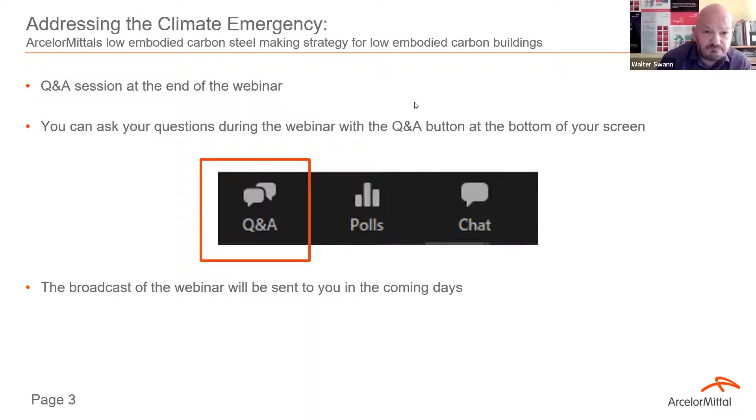I think the one thing about tackling the climate emergency is that we all need to be quite well connected and to be able to see things from different angles so that we can integrate processes, design processes, manufacturing processes together and have a deeper knowledge of the supply chain. So we'll start off with the steelmaking processes, but it will be relevant certainly to a structural engineer and to a broader construction supply chain. And we will tackle some numbers towards the end of the presentation. So hopefully something for everybody.

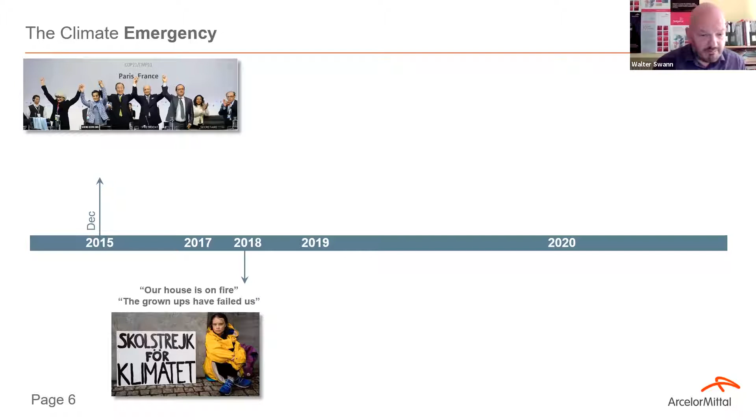So starting with the climate emergency. A little bit of a timeline, not dealing with the stuff which I guess you're already aware of, but really just wanted to pick it up as it started in the UK. So for me, it started back in April last year with the Extinction Rebellion demonstrations, which took place in London. And then in June of that year, Theresa May, as she left the UK government, committed the UK to being net zero carbon by 2050.

And that same month, a website popped up, which was the Construction Declares website. So just in case you're not aware of that, this was about organisations, companies basically declaring or acknowledging that the building industry, the construction industry, is responsible for 40% of global CO2 emissions, and signing a declaration to say, well, as a company involved in that sector, we're going to do something positive to achieve that net zero commitment by 2050.

Organisations such as the Royal Institute of British Architects, organisations such as the Institution of Structural Engineers have all signed up to that declaration, but it also includes construction companies, architects, engineers, MEP professionals, cost consultants.

The diversity in the UK is greater, but it has travelled globally as well. I think there are about 12 countries that have signed up to that agreement, but it tends to just be the architects in those countries. So that's kind of where we're at the moment with that.

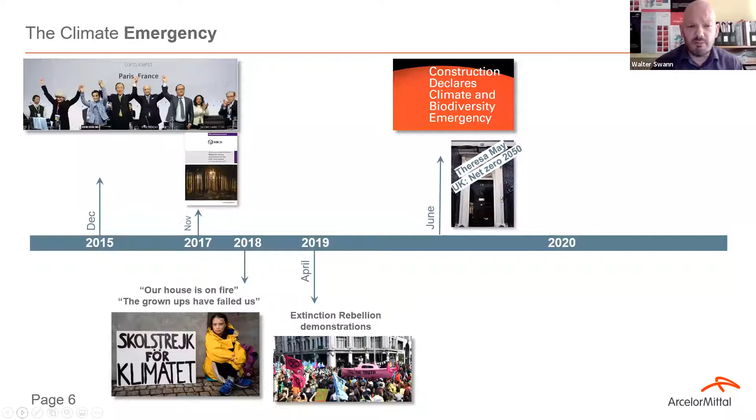Now starting to look at design guidance that's available. There's a couple of documents which I'll mention. There's the Royal Institution of Chartered Surveyors, which have this guide here. This is all about getting the measure correct, because if you're going to start to compare one scheme with another scheme or one building with another building, you've got to be able to compare apples with apples. So that's what that guide's about. That came out in November 2017.

In July of last year, there was a guide from the RIBA, and we'll pick that up later in the presentation. And in January of this year, there was another guide, the LETI Climate Emergency Design Guide. And again, we'll pick that up later. And then last month, we have the guide from the IStructE. So it's a paper which will launch the guide, which will be going out shortly. And that's been authored by John Orr, Orlando Gibbons, and Will Arnold. So that represents guidance being given to structural engineers on how to calculate embodied carbon.

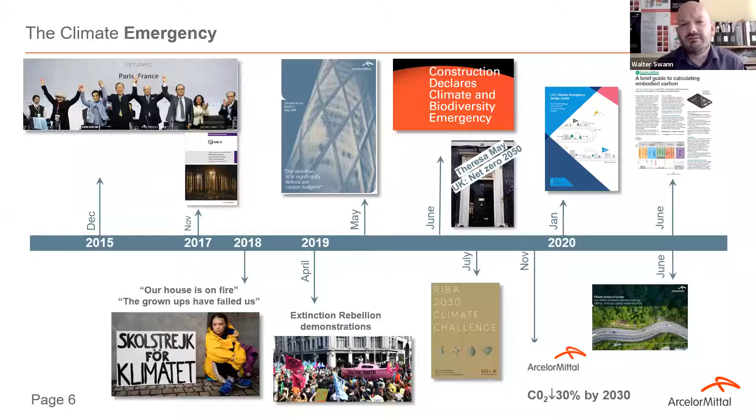ArcelorMittal, we launched our first climate action report in May of last year. In November, that was very shortly followed with the announcement of a 30% reduction in CO2 emissions by 2030. That's the target that we're chasing. And then in June of this year, we issued our second climate action report, which builds on the first. And you'll see a little bit of a change in thinking between those two reports.

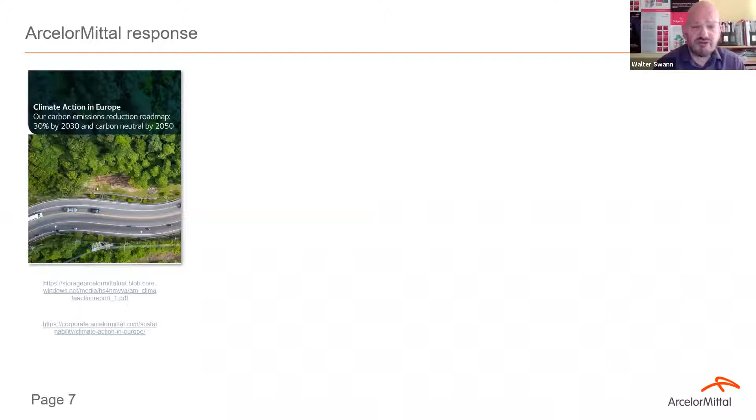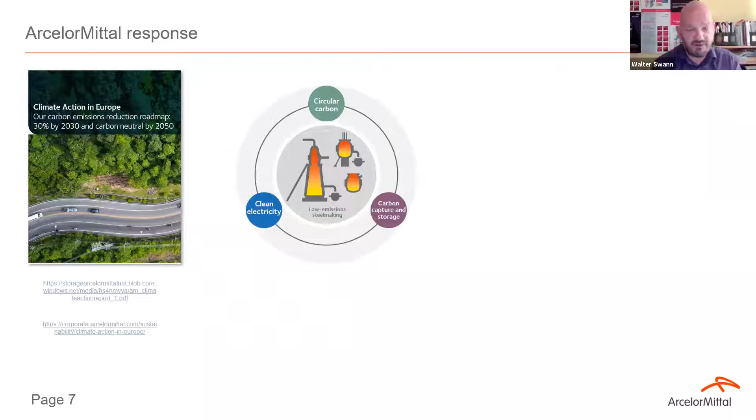So, working a little bit with that second climate action report from ArcelorMittal, what is our strategy? Well, our strategy is threefold. First of all, we're going to work within our own little bubble, and we're going to see what we can do with the steelmaking processes which we currently use. And I'll take you through that in the presentation, but just in very broad terms. We then have a program called Steligence, which is aimed at supporting designers to deliver on low carbon buildings, but of course using a palette of steel products. And then there's a third aspect to the strategy, which is something called Responsible Steel, and I'll deal with that one first.

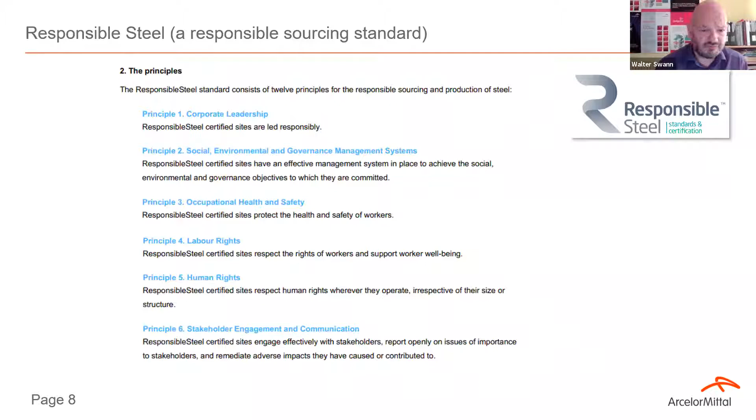So Responsible Steel, what is it? It's a responsible sourcing standard. It's not ArcelorMittal's baby, if you like. We are quite heavily involved in the standard, but it's a not-for-profit organization. And it's concerned with the sustainability credentials of the steel manufacturing industry, not the fabrication industry, but the manufacturing industry. The first 7 principles in that document essentially deal with people in broad terms. So it's about looking after the people and being responsible for the people in our industry. And then the 5 principles that follow are generally concerned with the environment.

But the one that I want to draw your attention to is principle 8. If you are a member of Responsible Steel, if you have been audited to Responsible Steel, then in that audit is acknowledgement that you have committed to the goals of the Paris Agreement. So that's the connection there.

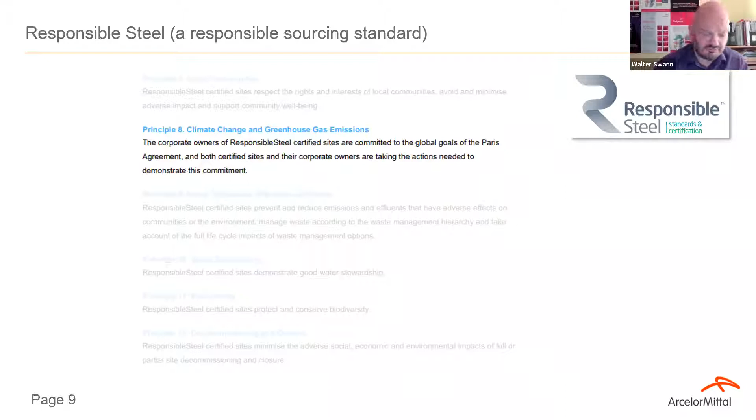I'm going to start to talk about steelmaking processes and how we're going to adapt them. But I thought it would be useful to look at the steelmaking processes and the ironmaking processes that we use today. So I'm going to start with the blast furnace, which many of you will be familiar with. So the blast furnace produces liquid iron. It uses primary resources, which are basically coal, limestone, and iron ore.

You get liquid iron out at the bottom. The slag floats on top of the iron, and that's used for a cement replacement product, as you all know. And out of the top go the gases. That's the chemical process. So we use carbon as a reductant to separate the oxygen and the iron ore. And that's the role of the carbon in that process. So one that you're probably quite familiar with.

Direct reduced iron might be not so familiar to you. It produces a solid iron product called sponge iron, and it uses natural gas as a reductant. Now, the top line of the chemical equation there is exactly the same as the blast furnace. So carbon is used to combine with the oxygen to separate the iron and the oxygen out from the ore.

But you'll notice in that second expression that the hydrogen component of the gas also plays a part in that reduction process. And it's that one that's quite important in terms of the future of the steelmaking industry, because that demonstrates that we can reduce iron ore without the need for carbon. And therefore, the only thing that we emit to the atmosphere is water.

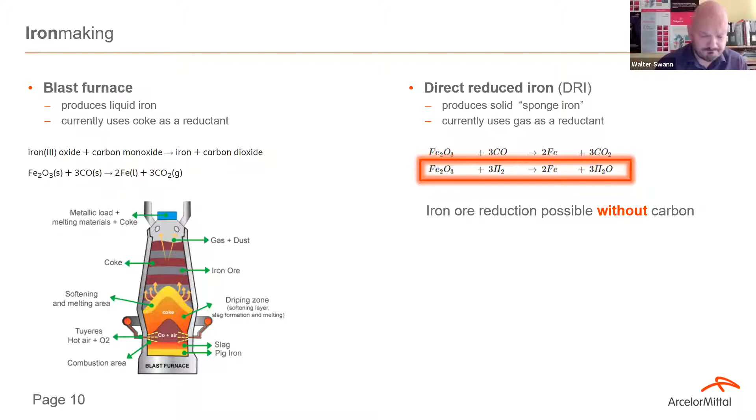So generally, once you've made iron, you then move on to steel. And there's one of two processes that is used. The first one is the basic oxygen furnace, or the basic oxygen steelmaking process. And what we do is we take the liquid iron from the blast furnace, and we essentially blow oxygen through the iron, and that turns it into steel.

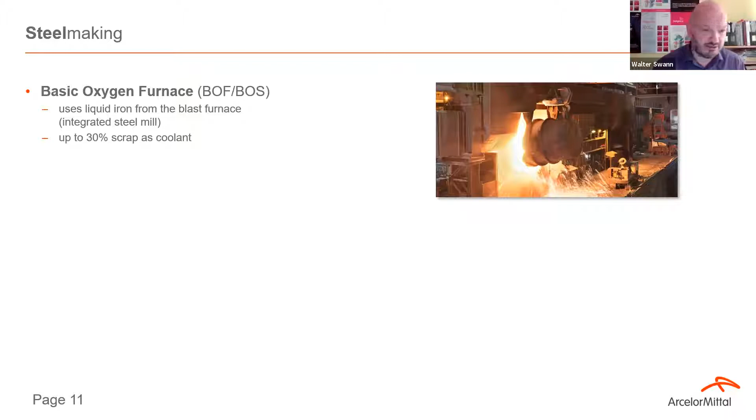A reaction takes place which generates a lot of heat, and the way that we control that heat is by adding scrap, and that scrap acts as a coolant charge in the process. When you pair up the basic oxygen furnace with the blast furnace in the steel industry, that's referred to as an integrated steel mill, and that kind of collection of processes is often referred to as primary steelmaking as well.

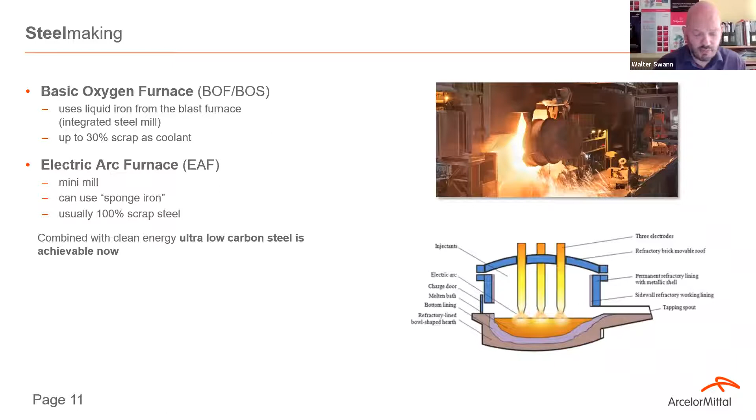The other process that we have is an electric arc furnace, sometimes referred to as a mini mill. And this can use basically a solid iron or a solid steel product, which you then melt down into a liquid. It's usually 100% scrap that's used, but we can use a mix of both scrap steel and sponge iron. And the thing about that particular process, sometimes referred to as secondary steelmaking, is that if we combine that with a green source of energy, then we can have ultra low carbon steel, and we can have that today, and that's something that we're looking at as an organization, as a company.

So what we've seen just in that initial introduction there is that steel is already quite a circular material. We capture all the available scrap globally, and that is fed back into the basic oxygen furnace, or it goes into the electric arc furnace. So all steel has recycled content. The only thing that varies is the percentage. We haven't talked about reuse, but we will talk about reuse a little bit later on in the presentation. And reuse for steel has significant potential.

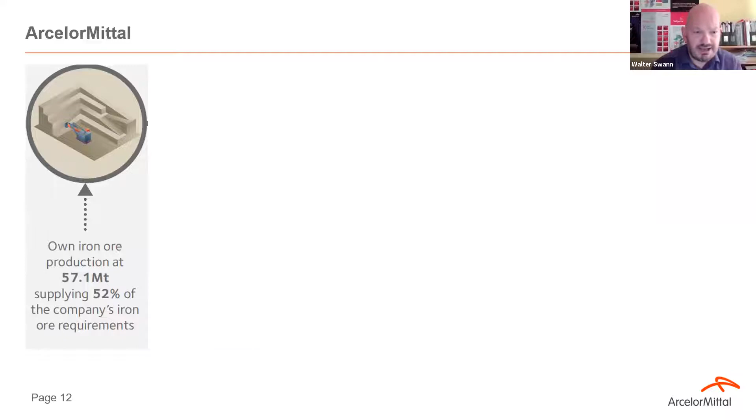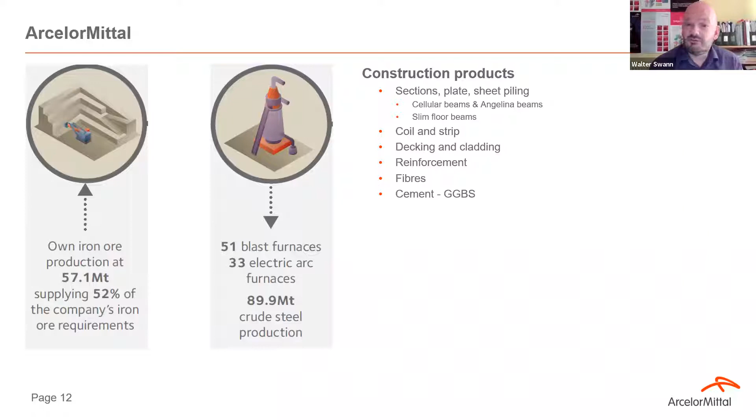So moving on and talking initially just a little bit about ArcelorMittal, so you understand the company. We think of ourselves as a mining and metals company, but actually we manufacture an array of construction products. Some of those you'll be familiar with, but maybe you won't realize that we also produce reinforcement. We also produce fibers for concrete, and we also produce GGBS, which is used as a cement replacement. And we actually have a tie-up with a company called Ecocem. So we basically have an interest in construction products.

We have a global presence, but what I want to do is just drill down on two items on this slide. The first one is on your right-hand side there, that CDP logo. So that's the Carbon Disclosure Project. Last year, we received an A- grade, which puts us at leadership level. And that is all about being transparent about carbon and reporting on carbon. And hopefully that transparency will be reflected in this presentation.

I now want to draw your attention to the blast furnace in the middle and just talk a little bit about the bits of kit that we have as a steelmaker. So we have 51 blast furnaces, we have 33 electric arc furnaces, and we have 13 DRI plants, and they produce between them 90 million tons of crude steel. About 30% of that volume goes into the construction sector, about 30% goes into the automotive sector, and the remaining goes into other industries. Of that volume, the 51 blast furnaces produce around 70%, the 33 electric arc furnaces about 20%, and the 13 DRI plants about 10%. So that gives you a measure of which bits of kit produce the most volume.

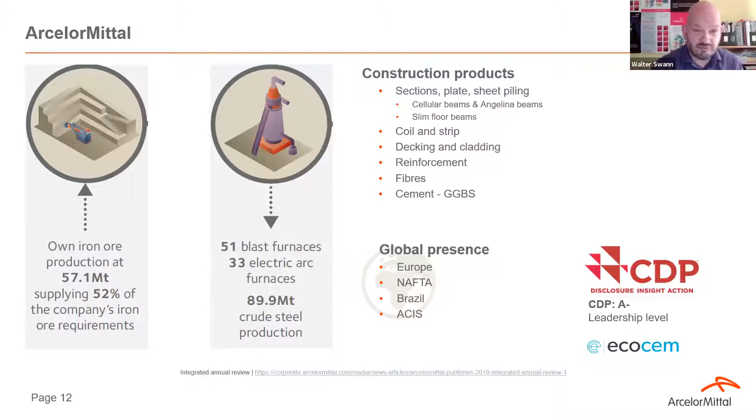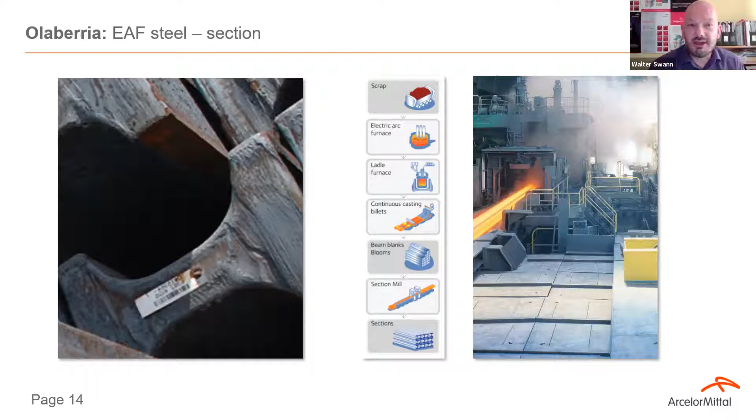Just want to quickly mention one of our mills in northern Spain at Olaberria. Again, that's an electric arc furnace mill, and it produces sections. Moving on to Gijon, again in northern Spain. This is a blast furnace facility. So blast furnace to produce iron, then a basic oxygen furnace to produce steel. And again, on the right-hand side there, we have an EPD, which is specific both to the heavy steel plates that are produced at that mill and also to that manufacturing process. And again, that is reflected in the data in that EPD. So again, this is all about transparency.

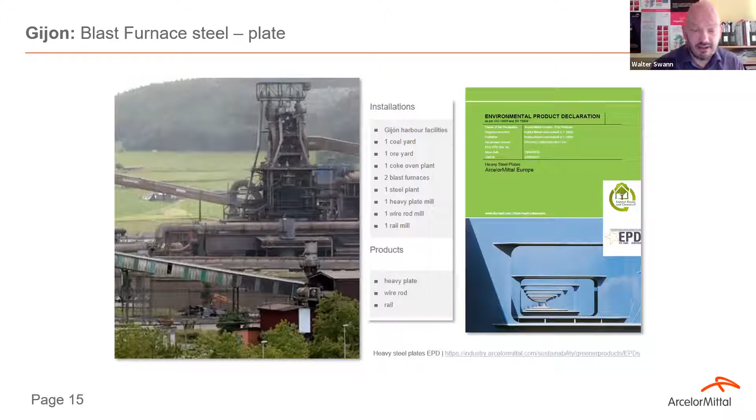The third facility I want to introduce you to is at Hamburg. This produces direct reduced iron, and that's the image on the bottom left-hand side of what that product looks like as it comes out of the furnace. This still runs on fossil fuels, but on gas at the moment, which is a little more friendly to the environment. It produces a product called wire rod, which is a feedstock for things like bolts, but also for reinforcement - rebar that goes into concrete. On the right-hand side, we have an EPD that is particular to that mill and that product. So again, transparency.

With DRI, you generally pair it up with an electric arc furnace, and that's indeed what happens at Hamburg. At that particular electric arc furnace, we use a mix to produce the steel - roughly a 50-50 mix of direct reduced iron and scrap steel. And again, that's reflected in the EPD.

The final plant I want to mention is in Ghent, in Belgium. This is what we call a strip mill. It produces coated steel, which is used in the automotive sector, but also in construction products like floor decking and cladding. I really want to mention it because we've invested quite heavily there - it could be regarded as an energy park, with the largest solar roof in Belgium and about 12 wind turbines, all generating energy.

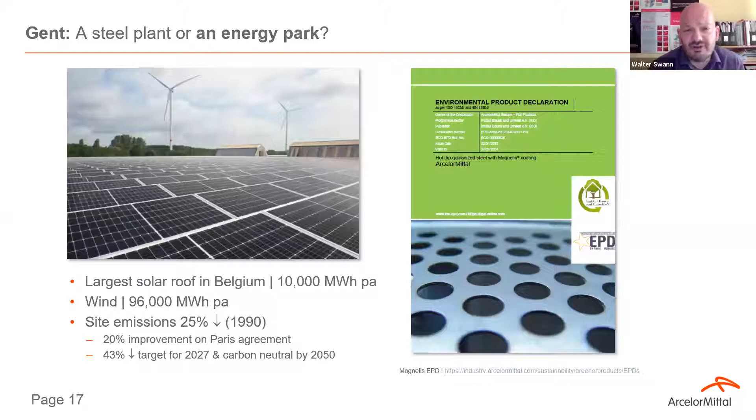Now moving on to look at the ways in which we're going to change the steelmaking process. We have a 3-strand strategy for this. One is we're going to work with the direct reduced iron process. Another is called smart carbon, and I'll go through those in a bit of detail, but not too much. The third is we'll see increased use of scrap steel as it becomes available in the marketplace. Initially, our focus will be on still reducing the iron with carbon.

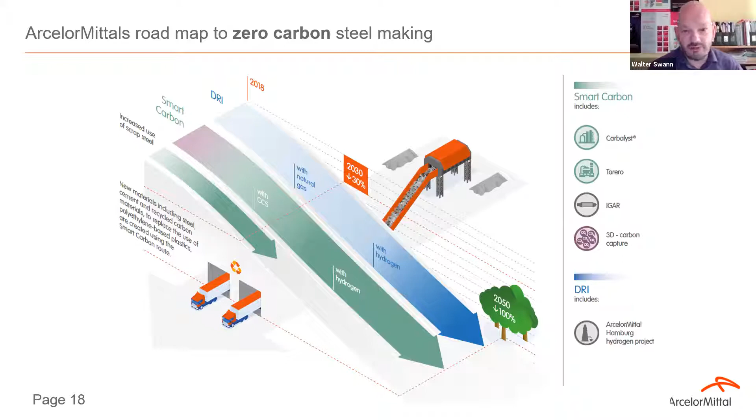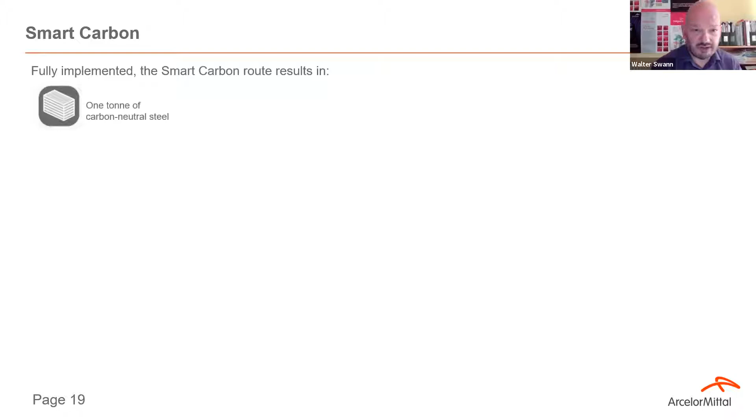And then ultimately we will transition to hydrogen - that's the broad game plan to take us towards carbon neutrality by 2050. So going through those processes in a bit of detail, but not too much: the smart carbon route. The wonderful thing about this route is it will produce 1 ton of carbon neutral steel. But that's not all you're getting - you will also get 250 kilograms of carbon neutral cement, and 200 kilograms of carbon neutral biomaterials, which can be used to make plastics. We also have the option of actually removing carbon that would normally be emitted to the atmosphere, making steel carbon positive.

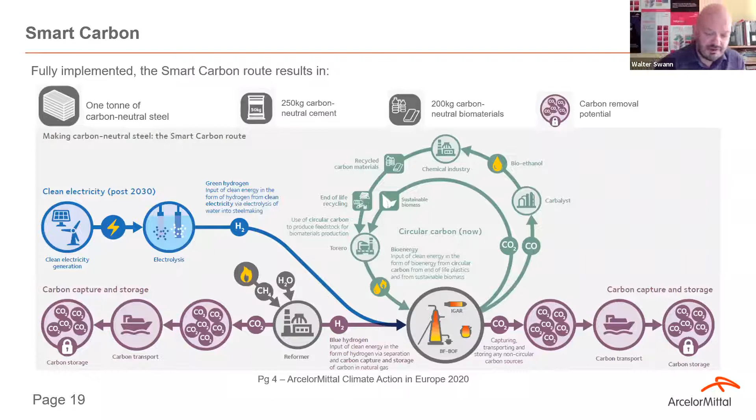How are we doing that? This is a diagram from the Climate Action Report I mentioned earlier. I'm not going to go through it in detail, but the point I want to make concerns that kind of circular green process. This is an adaptation to an existing process, but the vision is of a circular manufacturing process, which matches the circular nature of steel as a product. That is the way we're thinking as an organization.

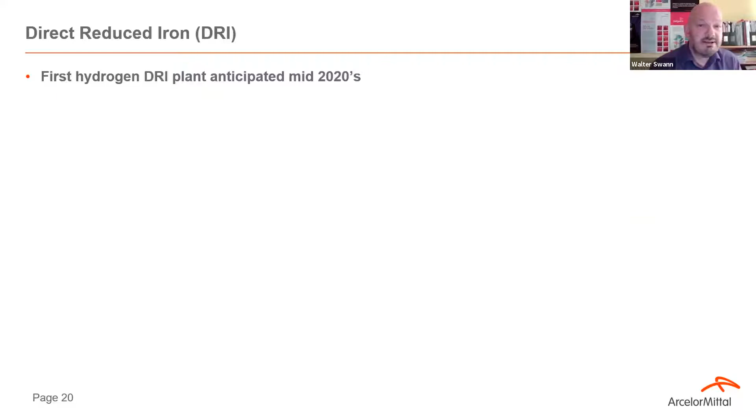The direct reduced iron process - we should have a plant running on hydrogen by the mid-2020s. We're currently working with a company called Midrex on the design of that plant. Again, it's an adaptation to an existing plant, the Hamburg plant, and all we're doing is changing the process gas that runs through it. But unlike smart carbon, it's not going to produce any co-products - there'll be no GGBS, no cement, no plastics. To achieve full carbon neutrality, we do have to generate a little bit of energy using circular carbon, and that is how we'll achieve carbon neutrality with that process.

So that's just a broad overview. More detail is in the Climate Action Report, and in the presentation there's a hyperlink to take you there, so you don't have to trawl the internet to find it.

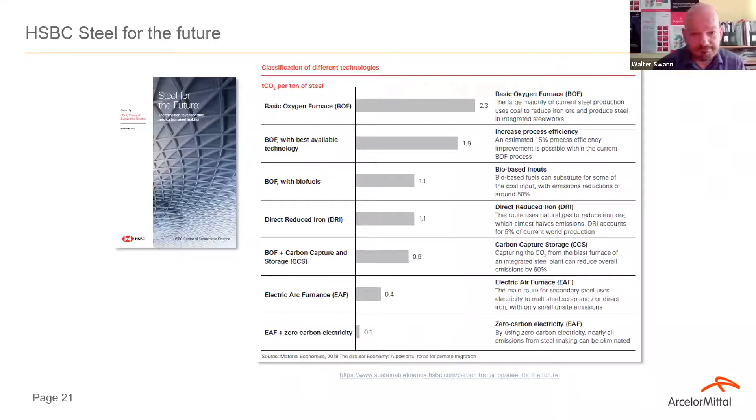So that's about our plans for the future. But the climate emergency is now. So what options do we have available?

Well, I've already mentioned our plants in Luxembourg. The Luxembourg cluster, as we call it, is where we manufacture our HISTAR steel section, available in a 460 grade, with higher grades on the horizon. So that's a mechanism for reducing material content where your designs are strength driven, and if you reduce material content, you reduce carbon.

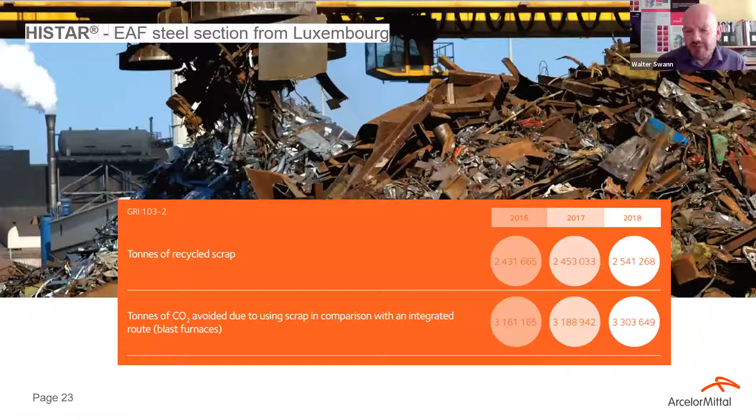Each of our sites produces a sustainability report annually. This is an extract from the Luxembourg cluster, and what we see here is that 2.5 million tons of scrap steel were gathered. That cluster of mills produces around 2 million tons of steel per annum, and that's displaced 3.3 million tons of carbon.

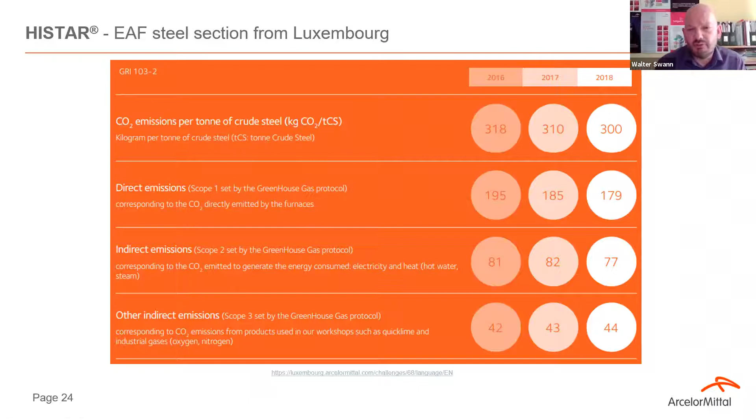If we drill into a little detail, at the top right of this slide we have the carbon footprint of the Luxembourg cluster: 300 kilograms of CO2 emitted to the atmosphere relative to a ton of steel. That's broken down into scope 1 emissions - from the furnaces - scope 2 emissions due to electricity and heating, and scope 3 emissions at the bottom. So some quite detailed information if you're looking for that.

The next question is, how as a designer do you go about perhaps specifying electric arc furnace steel? The one thing you can't really do - and we'll touch on this later - is simply say all steel must be from an electric arc furnace, because not all products are available in that manner, and it might not be relevant to do that. You need to know what's available in your market.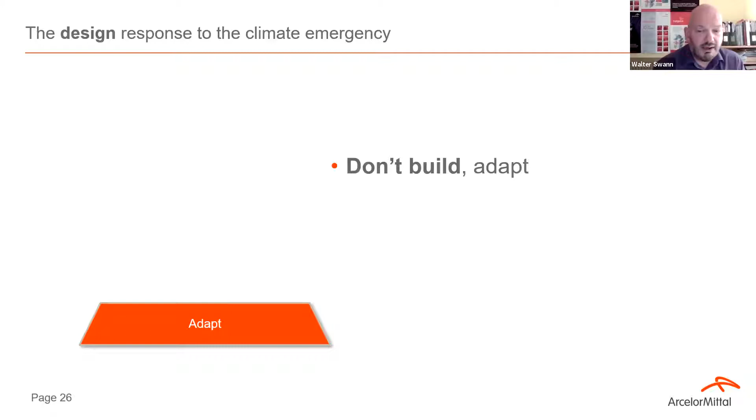I'm going to move on to design now, because if we're going to tackle the climate emergency, it basically starts with design. Maybe the first decision you make is not to build. If you don't build, you're not going to use construction materials, and if you don't use construction materials, you're not going to generate carbon. So perhaps adaptation should be the first process. But that's not going to be an option for all buildings.

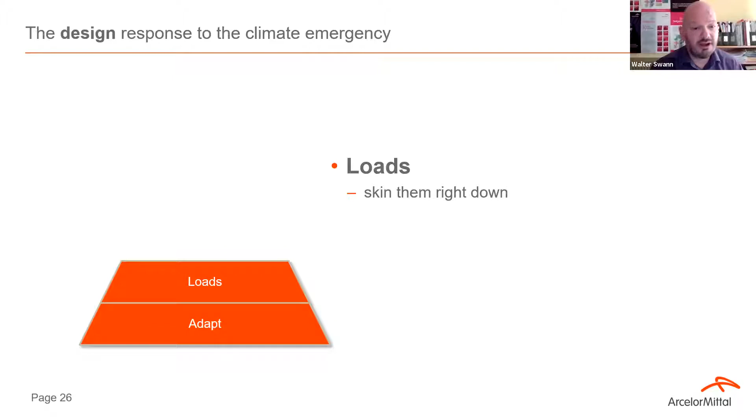So the next thing we look at is loads. For anybody who's worked in the design and build sector, particularly on things like portal frames, you'll know that the first thing a steel designer will do is look at skinning the loads right down, taking them to the absolute minimum, because that impacts weight, and of course that impacts carbon too.

The next one is to look at the materials, but perhaps in a holistic way. What makes sense? It's about using the right material in the right place, considering the mechanical properties of the material, and matching those with the particular kind of design requirements you have for the building.

You then move on to design. It's about pushing the utilization to the limit where possible. If you go over by 1 or 2%, does it really matter? It's about looking at deflections.

We use rather sophisticated 3D models these days, and sometimes we put limits in there. If we don't take a look at that, sometimes we can add mass, we can add carbon where it's not really needed. Deflection isn't really a binary choice, it's a bit of a grey area. If a beam deflects 2 or 3 millimeters more than it should, does that really matter? Can we live with it?

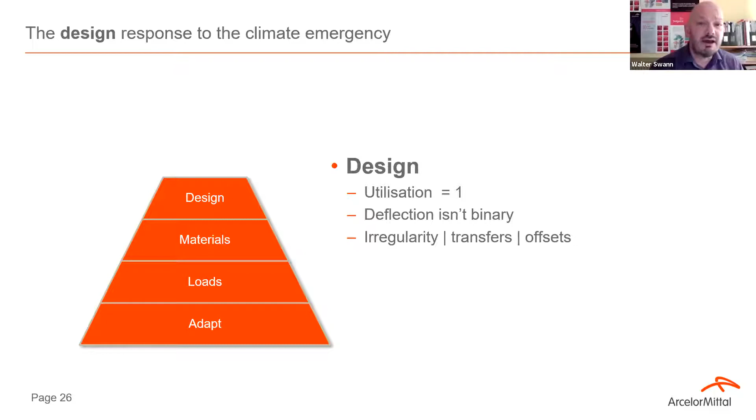The other area to look at is irregularity. Irregular grids tend to attract carbon. Transfers tend to attract carbon. Offsets attract carbon. They may be required, there may be no way around it, and that's absolutely fine. But can they be designed out? If they can, they will save carbon without a doubt.

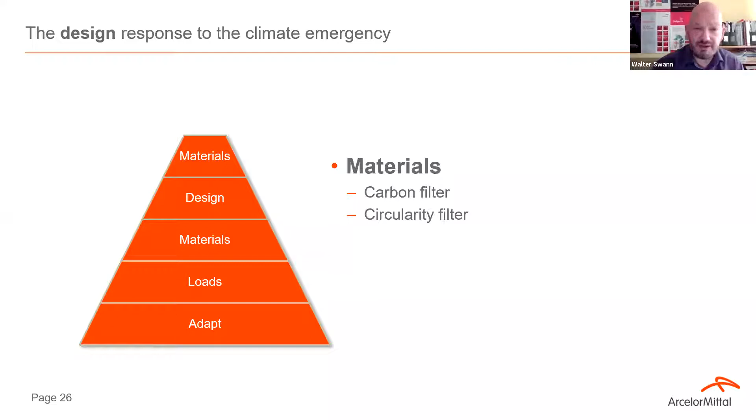And then the next step is to look at materials again, but this time you're revisiting your first decision, applying the carbon filter, applying the circularity filter. What can you do to deliver the best result? Does it change your thinking? Do you need to go down another route?

And then finally, really to emphasize a point, I think we need to become more integrated as a supply chain, both designers and manufacturers. As designers, engage with the supply chain. We're here to help you. We'll do whatever we can to help you understand the materials and manufacturing processes. And we'd also ask for your support as well. We need to understand what you're trying to do so that we can be a positive player in that relationship.

Moving on once more, looking at something available to designers. A number of years ago, we set in motion a process which would look at the way you put materials together in a building, and we called that Steligence. It's a holistic approach to building design, so it looks at the big picture.

Many of you will be aware that if you work on a building project, there are different players in that relationship. You've got cost consultants looking at cost, structural engineers looking at the weight of the structure, sustainability consultants concerned about the environmental aspects, the architect concerned with space and how it works for the client, the flexibility of the building, and the contractors and fabricators more concerned about speed of construction and risk.

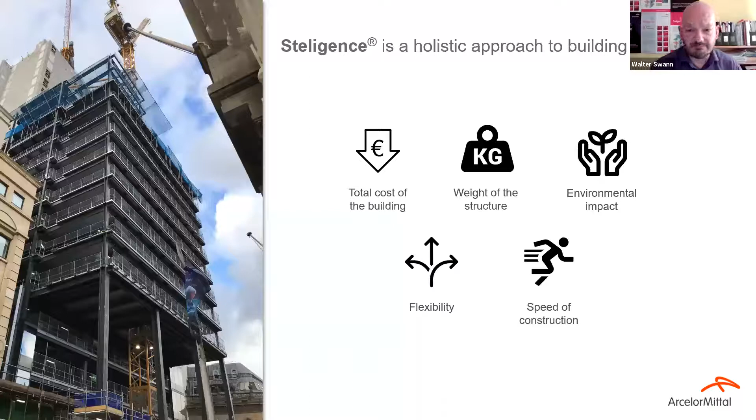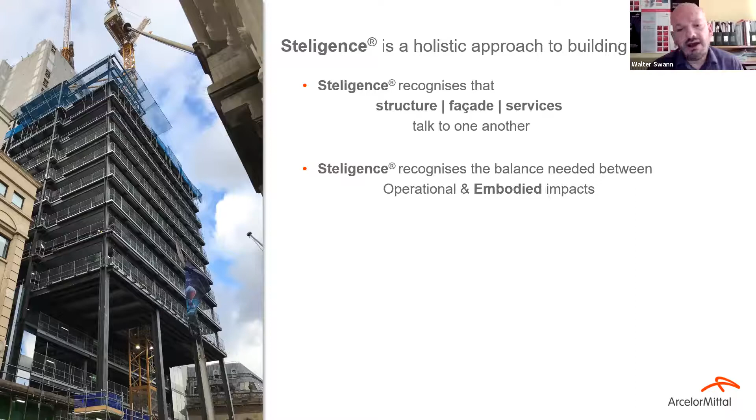If these disciplines don't talk to one another, if they don't share and trade information, things may not all pull in the right direction. Steligence acknowledges that. In particular, it acknowledges that structure, facade and services need to talk to one another, resulting in a more integrated structure. It also recognizes that operational and embodied impacts can't be considered separately - there's an interplay between the two, so it needs to be considered as a whole.

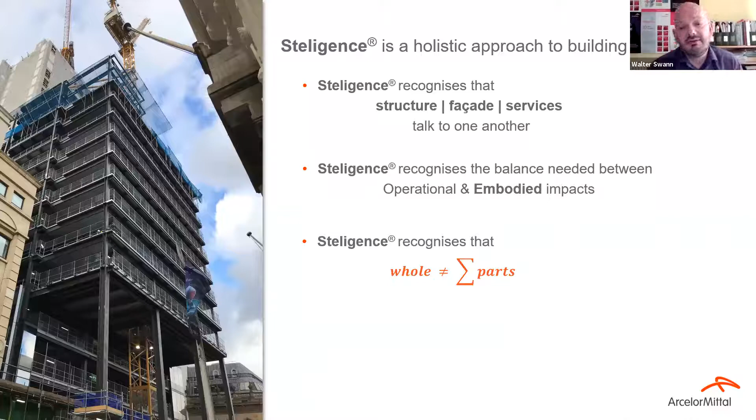In very simple terms, what Steligence acknowledges and realizes is that the whole is greater than the sum of the parts. How does it deal with that? Through two tools which some of you designers will be familiar with: a full life cycle assessment, including end of life, supported by a full life cycle cost analysis. What it tries to do is get that perfect balance between cost and carbon.

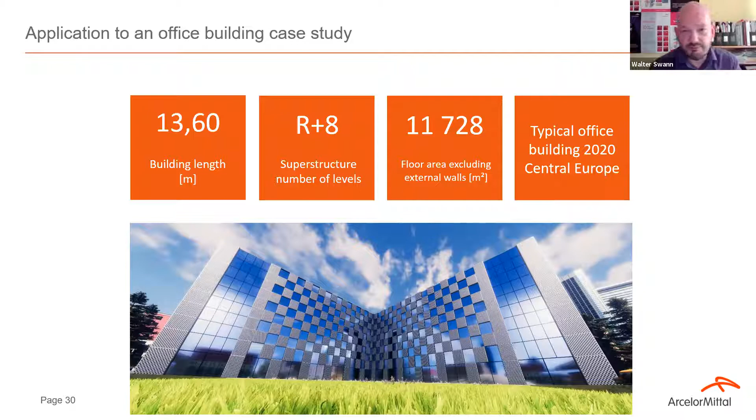Just to give you a flavour of what is happening with Steligence, we've done 2 studies so far, and we're looking at 5 building types. I'm just going to give you a quick overview of the office building study. Here's an illustration of the building: 13.6 metre span, 8-storey building, typical of an office building in Central Europe. It may feel a little bit different to those members of the audience who are from the UK.

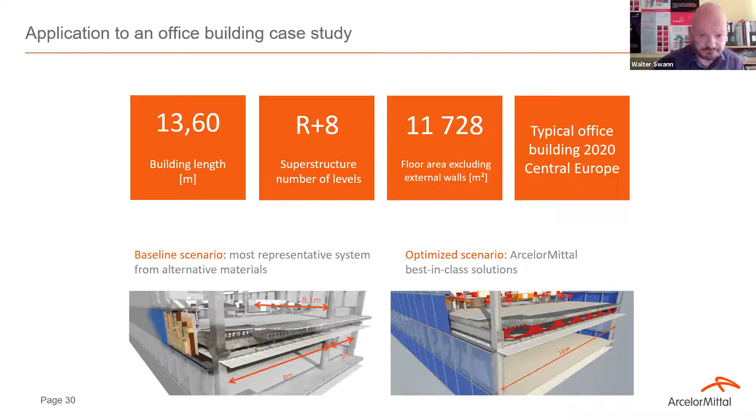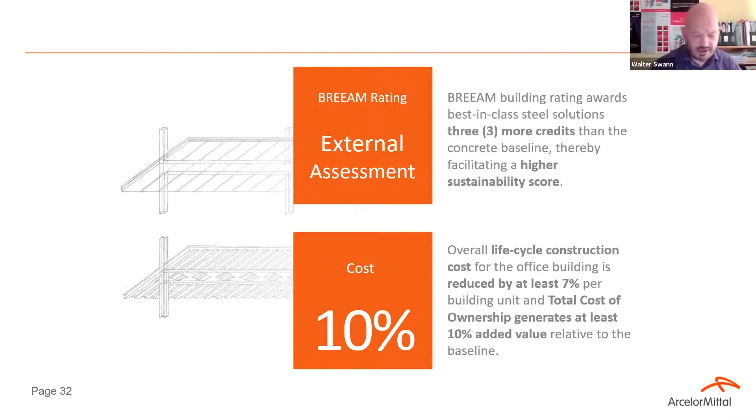The study highlighted 10 key benefits of the Steligence approach, the steel approach. To a UK audience, you may have seen some of these benefits before, but if so, they've come from a cost perspective only, possibly not really looking at carbon. The subtle difference with the Steligence study is that carbon is part of the considerations. I won't go through all of the benefits, I'll just quickly flick through one or two slides, but they're in the slide pack so you can see them. Some deal with cost, some with carbon, some with flexibility, but they are there.

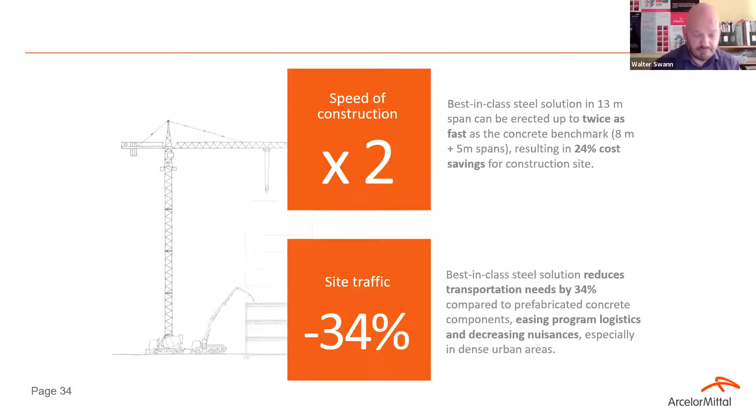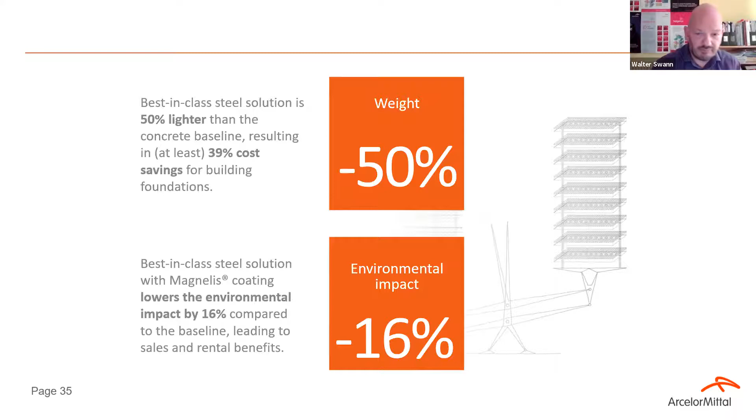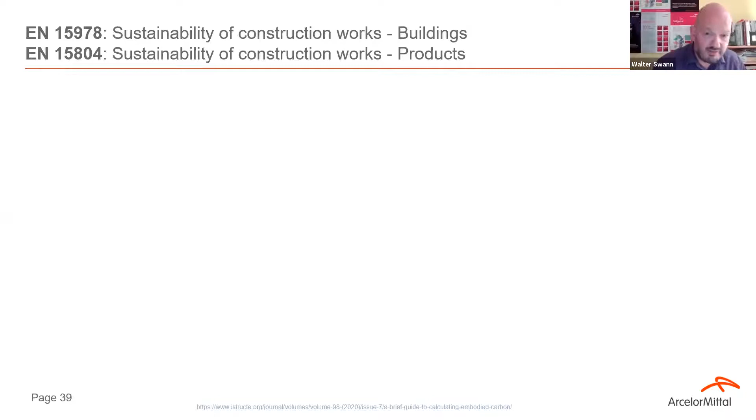It all starts with the product, with something called Module A, which covers all of the embodied impacts associated with getting materials out of the ground, manufacturing them at a manufacturing site, and getting them to the factory gate. So sometimes called a cradle to gate scope. The next part of the process is taking those materials from the factory gate, getting them to the construction site, and then getting those materials up in the air. That's sometimes called a cradle to practical completion scope, or upfront carbon.

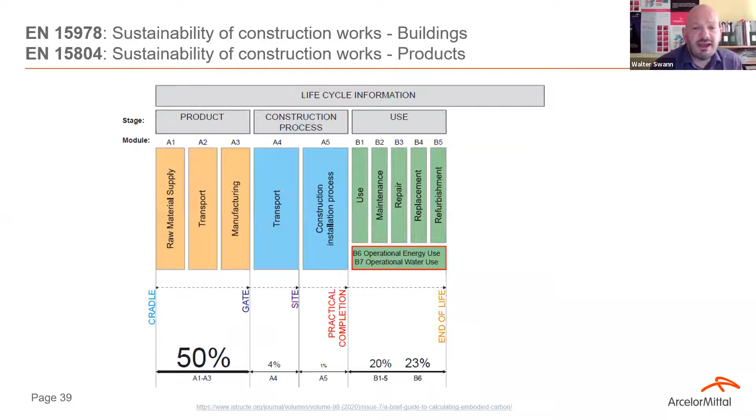The next part of the process is the in-use phase. It generally applies more to the energy used within the building, so it's operational. But if you are replacing cladding on a cyclical basis, or replacing the M&E services, that would be included in that part of the process. Almost the final process is when the building comes to end of life. How do you take those products down, and do they have any value at the end of life? In terms of deconstructing the building, it's cradle to grave. If the products have any value at end of life, then that becomes a cradle to cradle analysis, a full module A to D analysis.

Just a nod to the IStructE paper on this particular slide, because I borrowed it from their journal. I hope that's okay - I am a structural engineer.

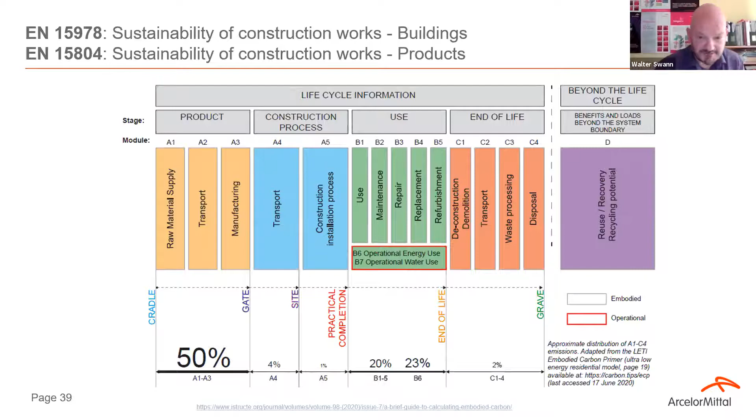I now just want to turn my attention to the guidance that has appeared in the UK. In July, we had a guide from the Royal Institute of British Architects. It has given targets to design to in terms of embodied carbon expressed per metre squared. So we have a target in 2020 of 800 kilograms of CO2 per metre squared. In 2025, that reduces to 650. In 2030, that reduces to 500. Those reductions are aligned with the requirements of the Paris Agreement, so they're science-based targets.

The other thing to note with this guide is the whole life carbon as well, so it's module A, module B, module C. No module D included, but the guide does make reference to the RICS guide, the Royal Institution of Chartered Surveyors, which does give some guidance on module D impacts.

The other guide which appeared in January of this year was the LETI guide - the London Energy Transformation Initiative. It follows a similar path in that it gives some embodied carbon targets, and those targets reduce as time goes forward, again aligned with the Paris Agreement. But those targets are based on a module A only assessment.

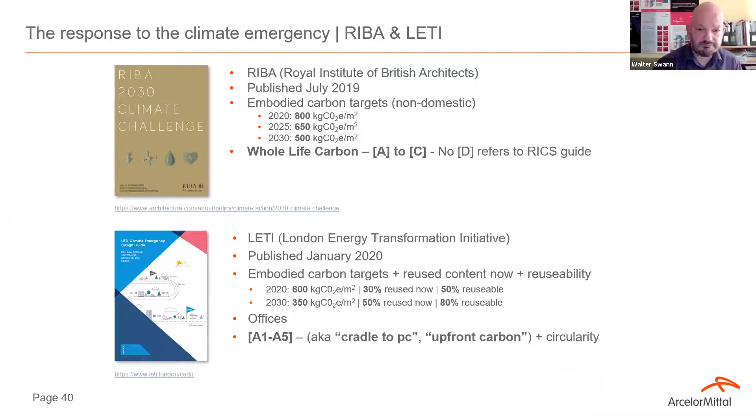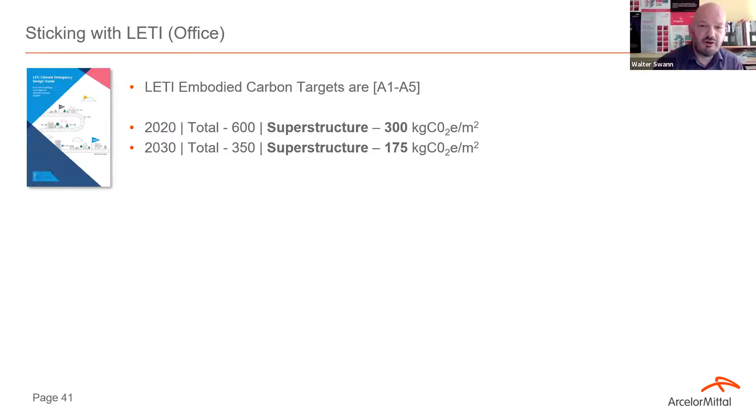I'm going to stick with the LETI guide, and we're going to just drill down a little bit into those targets in terms of the superstructure consideration. So if you look in that guide, on the left-hand side here is an extract from it, and it shows a typical breakdown of embodied carbon for an office building. We see that roughly 50% of it is concerned with the superstructure. And really what I've shown there is the superstructure targets now from the LETI guide.

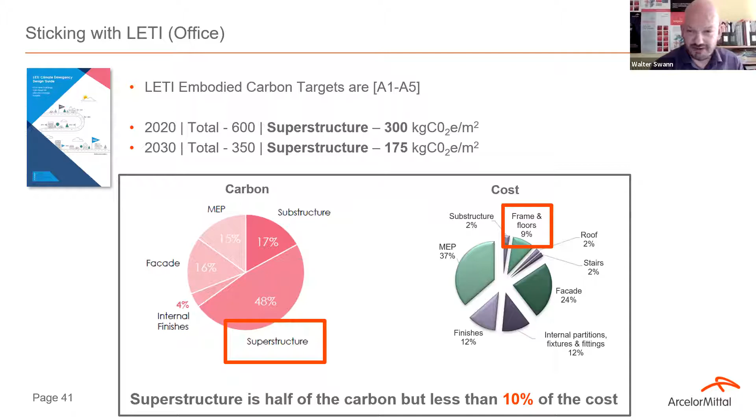Just out of interest and purely for interest and as a simple observation, on the right-hand side we have a typical cost breakdown for a multi-story office block. It's interesting to note that although the superstructure is responsible for half of the carbon, it only accounts for less than 10% of the cost. Maybe structural engineers should be paid on the basis of the carbon that they save. I don't know. Controversial.

So you're given those targets. You maybe think, as a structural engineer, what on earth do they mean? Certainly that was my reaction. I did do a little bit of a literature search, and this was one of the documents I found. It appeared in the Structural Engineer in October 2012, and effectively it was a full cradle-to-cradle analysis of 5 steel building types. It also looked at concrete alternatives, as you'd expect.

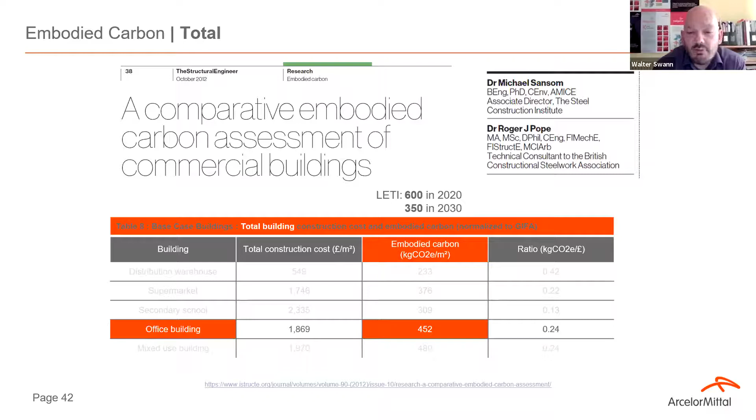So I'm going to initially look at the embodied carbon in the total building, and I'm going to just focus on that office building. The paper tells us that we have a total embodied carbon of 452. If we compare that with the LETI figures, initially it looks quite promising compared to the 600 target in 2020 and the 350 in 2030. So some work to do going forward, but we've got a little bit of room to breathe at the moment.

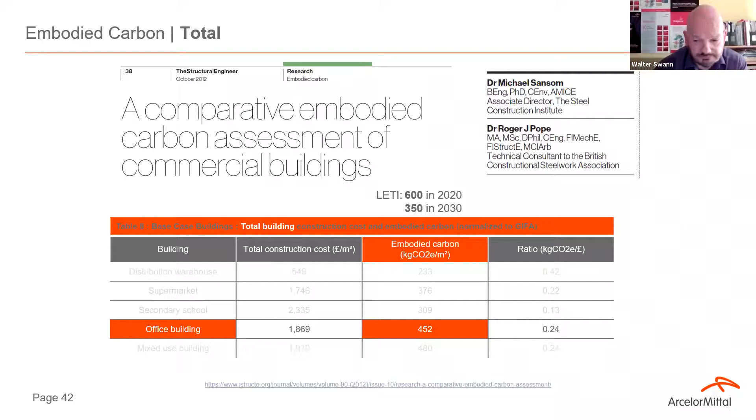And then if we drill down and look at the superstructure, the frame and floors, again for the office building, the figure there is 219. And if we compare that with the LETI document, we've got a target of 300 now and 175 in 2030. So that might make you feel a little bit comfortable. It helped me, but we do need to understand that we're not comparing apples with apples here.

The exercise done in the paper was a cradle-to-cradle analysis, so it was modules A through to D, taking into account the end-of-life benefits, whereas the LETI guide is only looking at module A. So how do we start to make sense of that?

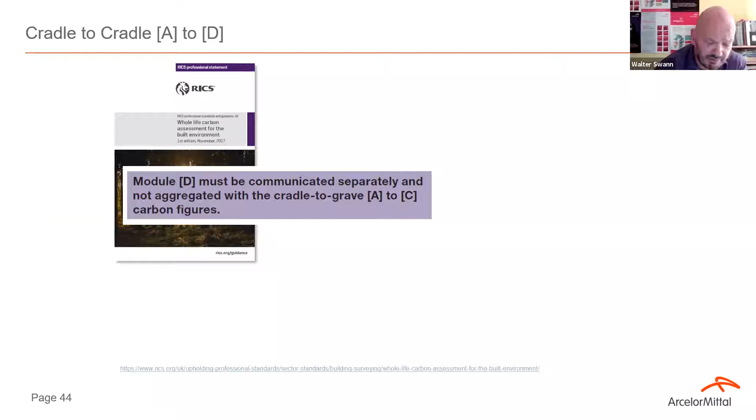So just picking up on that point and referring to the RICS guide, which came out in 2017, 5 years after the paper in the Structural Engineer, it has made an explicit request of designers: if you are doing carbon assessments and looking at module D, you must not aggregate it, you must communicate it separately. The IStructE paper basically aggregated those values, so it didn't quite comply with the requirements of the RICS guide, but it was before its time.

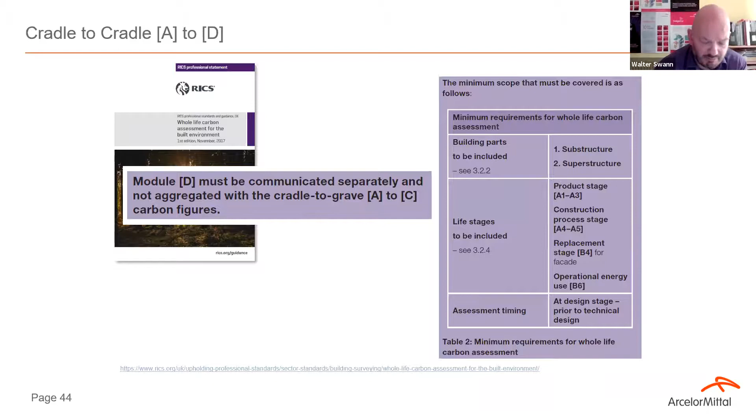In that RICS guide, it also gives a minimum scope, and the minimum scope is module A. So that minimum scope is aligned with the LETI guide, or the LETI guide is aligned with that minimum scope. But the RICS guide does recognize that if you want a full picture, a complete picture, then really you should be doing a cradle to cradle analysis.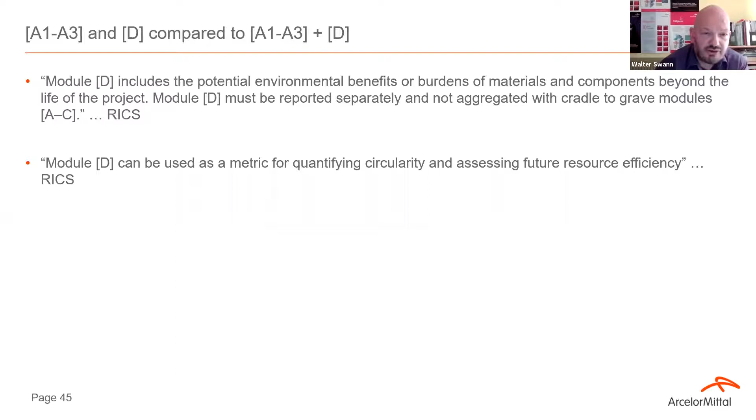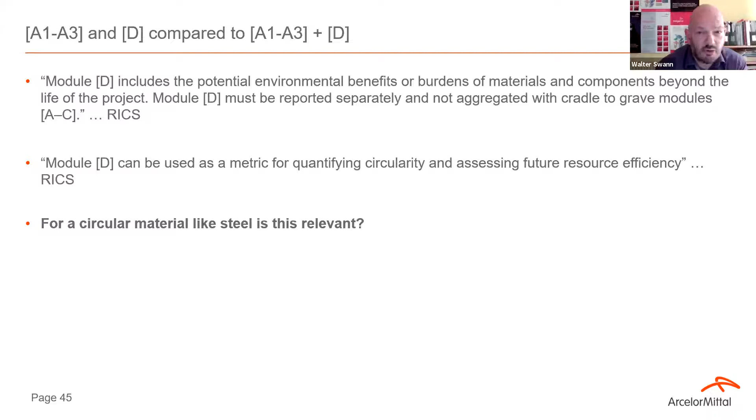Just to labour the point, the RICS guide says Module D reported separately. It does acknowledge that Module D can give you an idea of the circularity of the materials that you're dealing with. And really the question that I want to ask you is, is that relevant for a circular material like steel? We've already seen that in production processes now, there is quite a high recycled content in the steel that we're using. So it's already circular.

And I also want to highlight just one of the difficulties that you might have as a designer, and maybe hint at an answer. So two EPDs which are available to you in the marketplace. You have an EPD for our HiStar product, and you have an EPD for British Steel for their products. And if you look at the Module A values, the choice that you'd make would be obvious if you just looked at Module A. But the question is, is that a fair comparison?

So we then look at Module D, and we see for the ArcelorMittal HiStar steel, we have a value of 87. So it's positive, which means that it's a burden, if you like. And for the British Steel EPD, it's minus 1600. So that is a benefit. So why is that? Why such a big benefit? Well, the British Steel EPD, the source is blast furnace steel. So it's made from primary resources.

At the end of life, that enters the circular steel system, the recycling system. By doing that, it displaces primary resources. So that's why you get that rather large negative benefit. And of course, to try and compare the two, what you want to do is you want to aggregate those values. So you're allowed to do that, but you just have to report it separately.

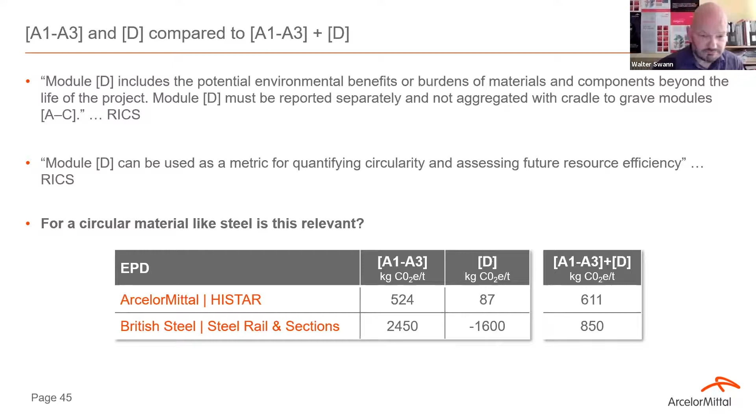So there'd be a natural inclination for any designers to say, right, we've got a climate emergency, let's go for electric arc furnace steel. And we fully understand that, but we think you just need to consider one or two other things. And this is the point which we're trying to make. So steel products are made using different manufacturing routes. There's no real reason why they couldn't all be produced using electric arc furnace. It's just that it doesn't make sense to do that at this stage in the game.

So with sections, you have a choice. There are organizations that make electric arc furnace steel. There are organizations that make steel using the blast furnace and the basic oxygen furnace process. In the case of plate, there is no availability, not in the construction sector, for electric arc furnace plate. In the case of tubes, tubes are made via plate. The plate is made via the BOS process. Decking and cladding comes from the basic oxygen furnace. Reinforcement, you have a choice, electric arc furnace or basic oxygen furnace.

So what approach should you adopt? Well, I think the first thing you've got to do is you've got to have that big picture view again. Steel is already circular, all the steel is captured, it's all recycled. The only thing that changes is the amount of recycled content. If we look at the global logistics, there's only about 30% of scrap available in the world at the moment. So we simply can't meet demand.

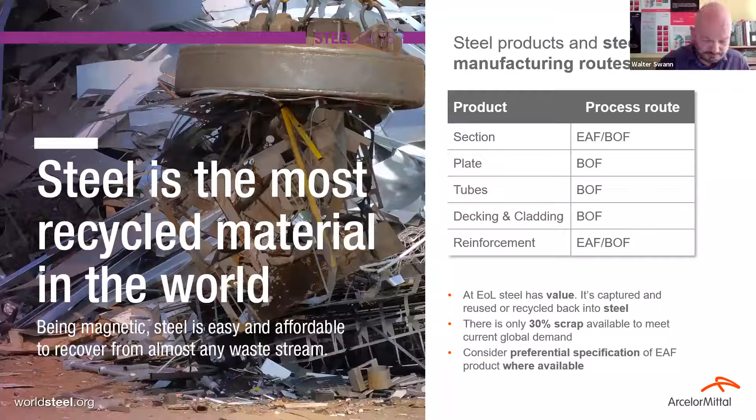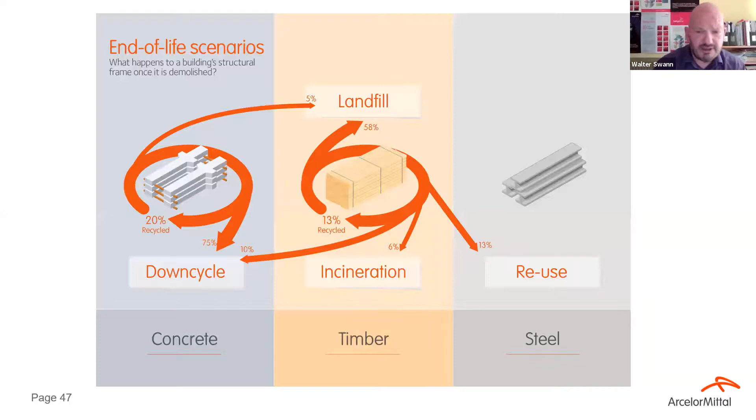Looking at end of life scenarios, and going to move on to some figures. If we look at concrete, these are kind of the industry statistics. About 20% of it's recycled, 75% downcycled, 5% landfill. There are then some figures for timber. It's a little bit more complex with timber. And then if we look at steel, about 88% recycled, 11% reused, 1% to landfill.

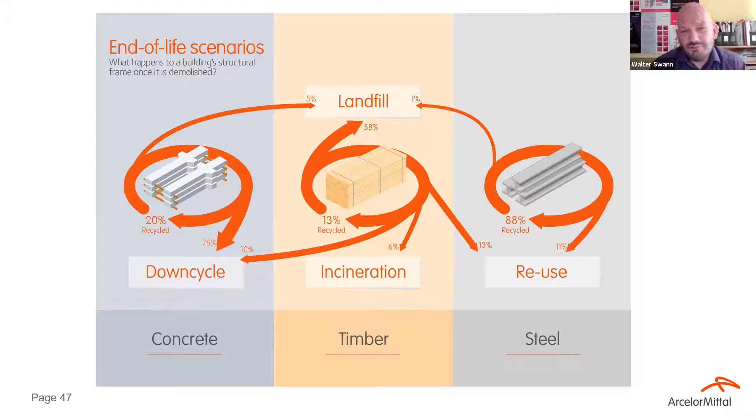So the thing with steel is that we've got a lot of knowledge about the end of life. With other materials, it's maybe not so certain. And maybe that's one of the issues. If you are going to compare materials, what's the best way to do it? You could just take a look at the embodied carbon factors and you could say, right, we'll compare steel with concrete with timber.

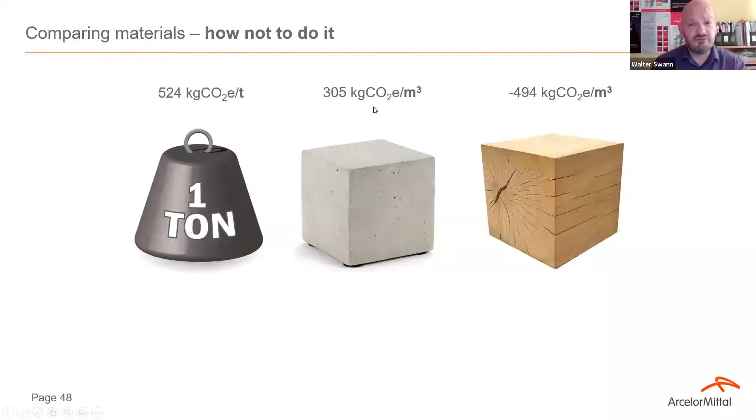If you do that, of course, you're going to go for timber because it's a negative number. You might follow that with concrete because that's a lower number. And then you might go to steel, but that's not the right way to do it. You need to take into account the metrics of the unit of measurement. So with steel, it's generally tons, with concrete meters cubed, with timber meters cubed. So we need to do some maths.

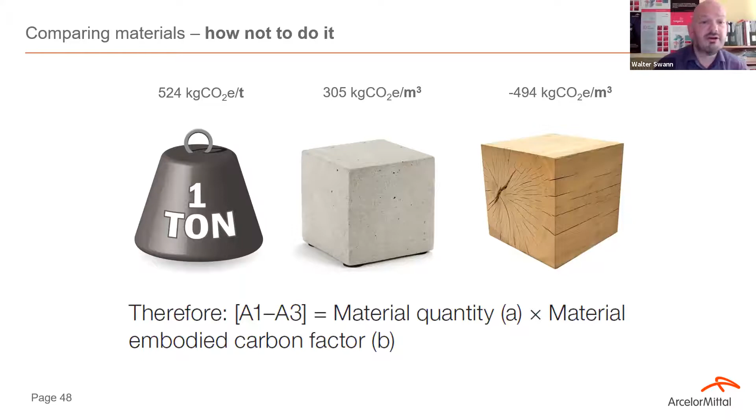We then do the same for timber and we've got minus 90. It's a no-brainer if you look at module A. If you do the whole life carbon approach, you'll add the module B if it's relevant, you'll add the module C, you'll look at the cradle to grave, and then you'll report the module D separately. But then maybe just to make sense of those figures, you'll then bundle them together. And what we find is that if we do a cradle to cradle analysis, that equation flips.

So pretty important, I think, that you look at the full picture. Also, what's critical is the end of life scenarios. So what I've tried to do is follow the previous guidance in terms of separating that out for timber. But the main point is cradle to cradle is the thing that gives you the full picture.

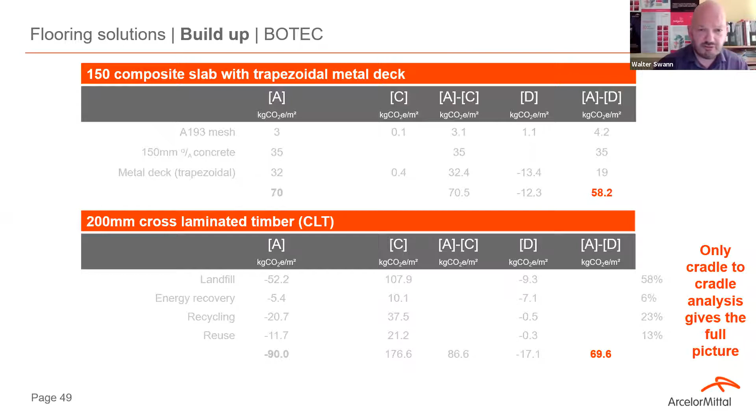If we look at short span or clear span, so again, I've seen a little bit in social media talking about the fact that, you know, if you want to save carbon, you've got to go from clear span to short span. If you make it a binary choice, you can't argue with that. But I think there's a little bit more to it. So what I've done here, again, just looked at module A as required by the LETI guide. Our slab has an embodied carbon of 70.

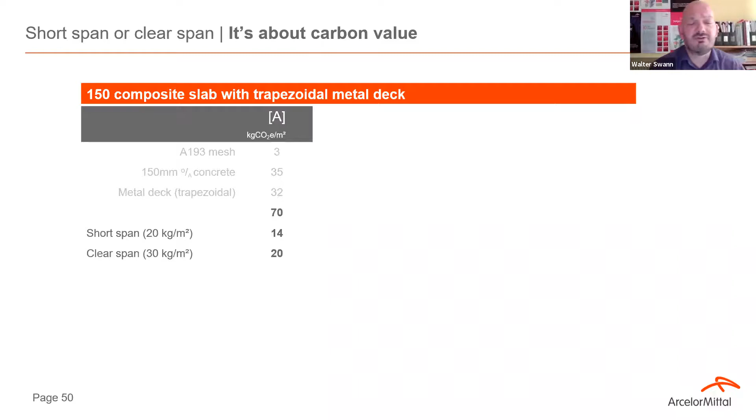If we do a short span beam, we add 14 kilograms of CO2 per meter squared to that. If it's a long span, it's 20. So the difference is 6. Is that a big deal? But let's do the full life cycle assessment. And at the end, we find out again that the difference is modest.

Clear span's about value. What else do you get for the carbon that you're actually having to pay with? You get flexible space, you get a loose fit, you get space that's adaptable, that can accommodate change of use, and therefore you've got a longer in-service life. So you're getting carbon value over the life cycle.

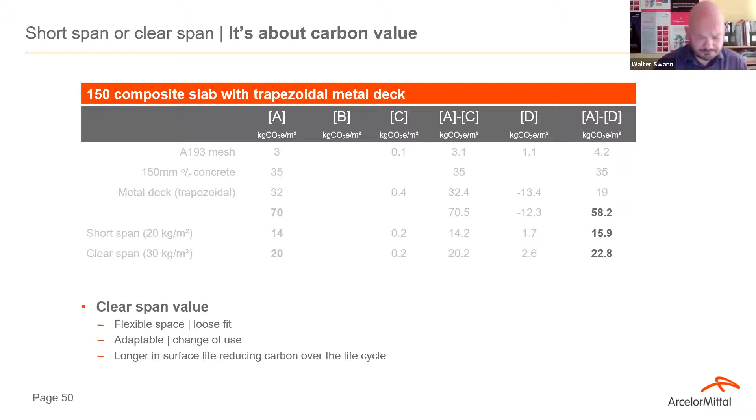And final slide, you'll be glad to hear, just picking up on one or two themes to do with the circular economy. And it's all about loops. The first loop is the recycling loop. With steel, it's a given. If you design steel today into a building, we know with absolute certainty that it will be recovered at end of life and it will be turned back into steel products. But we've got to do better than that.

Repair. Repairing steel, relatively easy. Again, that's something that isn't an issue. If you think about refurbishment for buildings, steel is often a facilitator because it's high strength, low weight. If we look at reuse, 10% of steel is reused today. Yes, there's more to do. Yes, we can do more, but we're kind of on the right track.

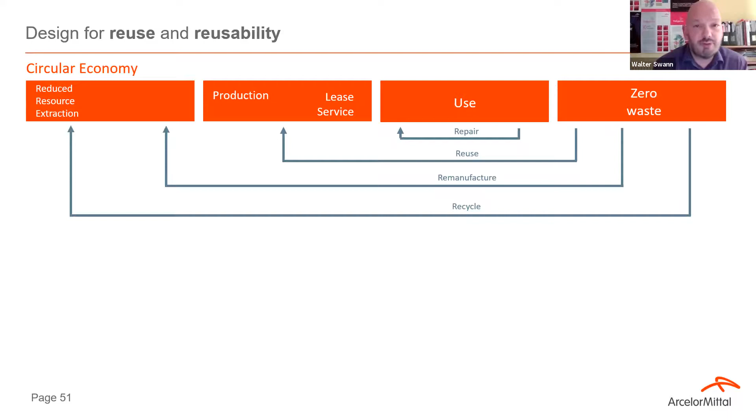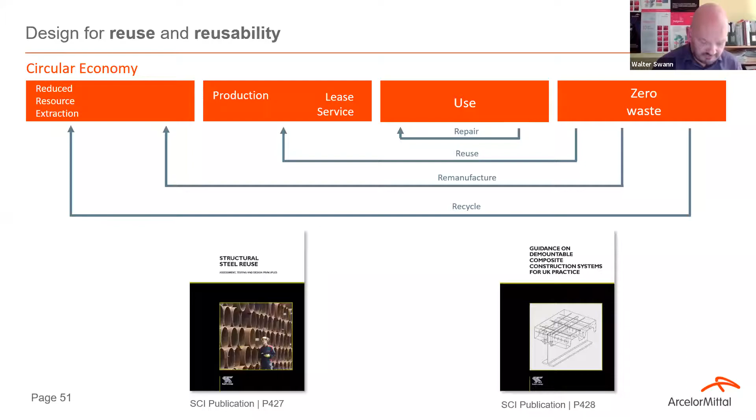So just a couple of words to wrap up, and then we'll go on to questions and answers. So just to say thank you for listening.

Steel, it's a little bit of a tricky material, isn't it? It does have high embodied carbon content. We can't get away from that. That is going to change going forward with those processes that we've outlined. But you've got huge potential in terms of its circularity. So the question is, how do you balance those two parts of the equation?

We don't have a full answer for you, but it does have to be part of the analysis. And perhaps it shouldn't be a binary analysis. Perhaps it needs to be a little bit more holistic. Perhaps it needs to be a little bit more future looking.